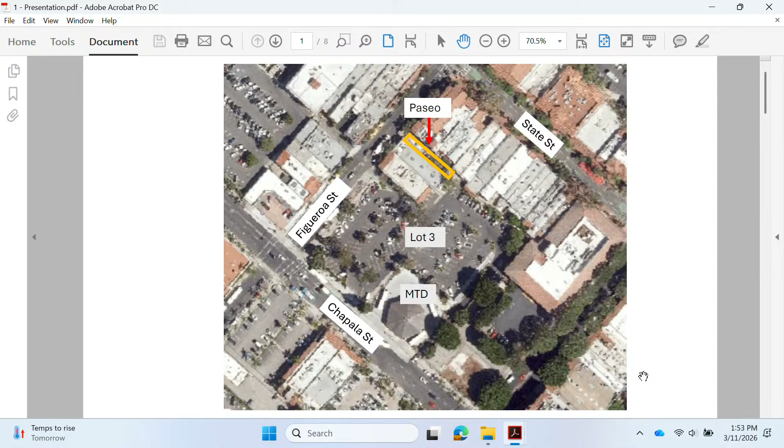Thank you, Sarah. Just wanted to orient everyone. First, I'm Chelsea Swanson, project planner. So we're looking at the area outlined in yellow, which I think most of you are familiar with. This is at Lot 3. It's a paseo between the lot and Figueroa Street.

As Sarah mentioned, one of the goals is to remove approximately 6 columns that formerly had a wood trellis over them many years ago. It was removed, it was rotting, so we want to open up the paseo and get the columns removed.

Also, as mentioned, there are many different materials in the paseo due to utility work over time and not replacing those materials. So one of the goals is to create more of a uniform look.

The way we would propose to do that is with what's called StreetBond. It's an epoxy layer that you can roll on or spray on. We got a few samples for the working group.

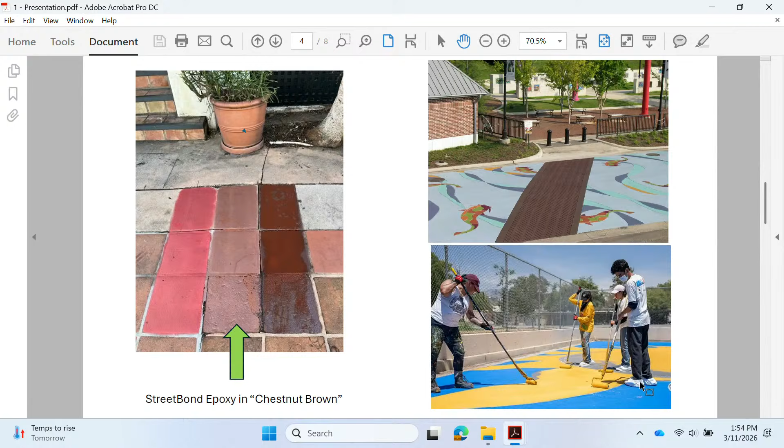We've looked at doing more of a zigzag pattern, but we're open to any pattern suggestions, and that would be throughout the entire paseo.

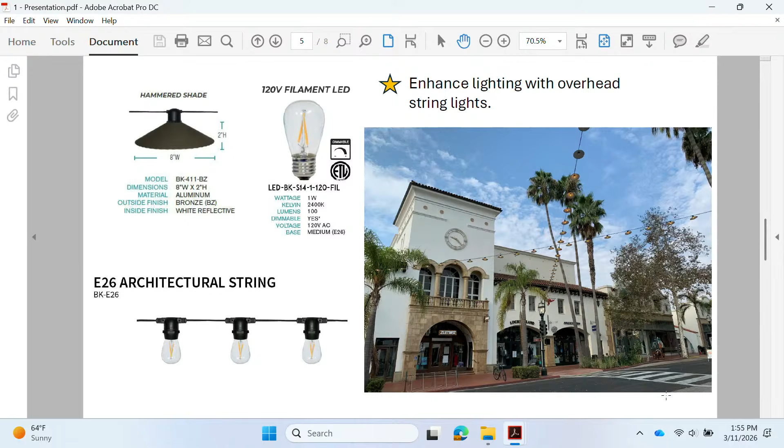I don't have an image of it, but as Sarah mentioned, we would also put twinkle lights on the center tree to add additional lighting.

As mentioned, we would like to add some screening in front of the transformer as you view it from the Figueroa Street side, which it's closest to. We would propose a large singular pot in front of it, with an olive tree planted in it.

There's an option to add some aloe at the base of the pot as well, since we do have concerns about people sitting and hanging out, which can happen if we have a large pot.

There are 3 existing in-ground planters where we would refresh the landscaping with jade, right here, which would match what's in the existing planter that you can see from Figueroa Street.

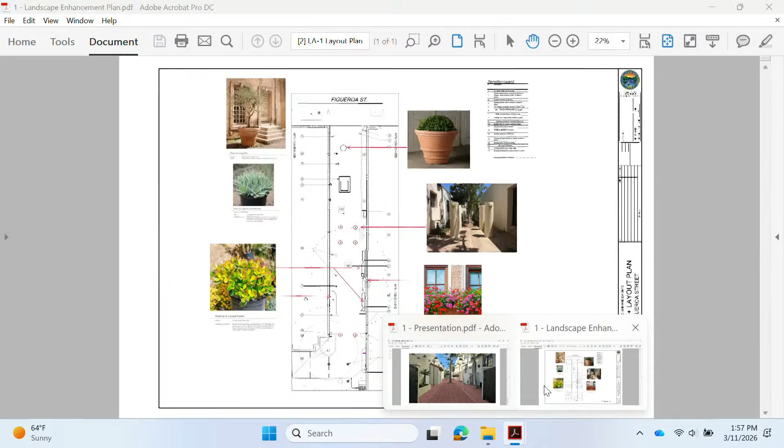I'm just going to quickly go to a plan view to give you another perspective. So Figueroa Street here at the top of the plan, and lot 3 at the bottom. The transformer is approximately here, and the idea would be to screen it with a pot here with the olive tree in it.

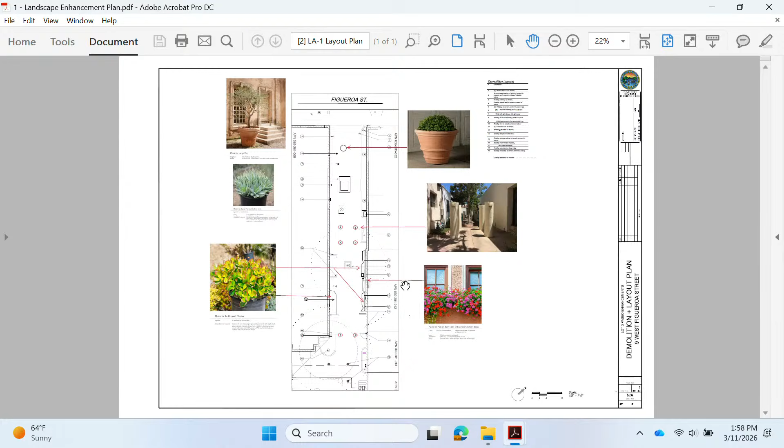These circles are just the column locations that would be removed, and the jade plant would be added in the existing planters. It's not in this image, but there would be overhead string lighting throughout. So that pretty much covers what we're proposing. Welcome your questions. Thank you.

And just as another note for commissioners, while this is the midway plan, the early plan, they also tied to the longer range plan for additional garbage enclosures and things like that. But then picking out the areas that can be done now with a smaller budget, which don't have to reverse things later. The idea was that Arcadia had worked it out a little more with everyone's working group, even the mayor, and the village and the city. The nice thing is they're not going to have to go backwards from this plan to the next, finally finished plan. So I just wanted to add that as an additional piece.

Okay, so if that completes your presentation, we can go to public comment on this item. At this time, I do have one speaker slip for public comment. Rick Clausen, if you want to come speak.

Thank you, Commissioners. You turn it off. Thank you, Commissioners, I'll say it again. I'm quite happy to see this item on the agenda today, and I'll just give you the executive summary. I think it looks terrific.

From the public standpoint, and I may be the only person here as a member of the public, but I do remember this project when it started several years ago, and I was frankly a little suspicious. It came, I think, from the transportation or traffic department, and it seemed to me like it was promising to pay you Tuesday for a hamburger today - that if you let us close this Paseo because it's a harbor for trash and unsheltered people live there, all those reasons the businesses wanted it closed, we will figure out a way to create a Paseo continuation from across the other side of Figueroa. I thought, okay, I don't buy it.

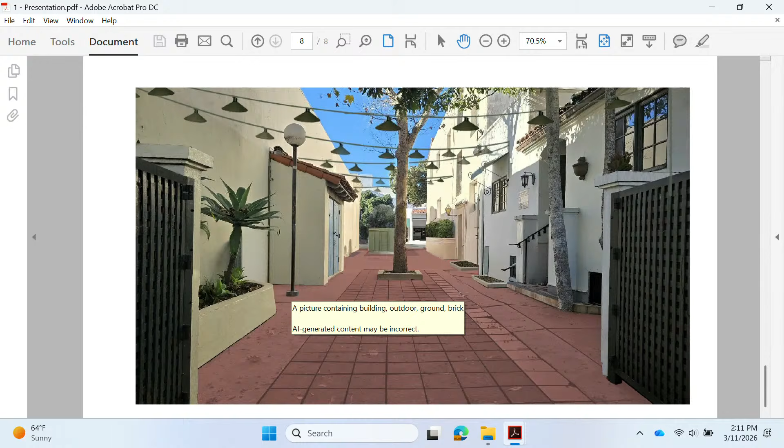Also on the right-hand side, there are some, I don't think, are those curbs there? There's no, also there aren't curbs. We apologize, this was an AI-generated simulation, so it's just not quite accurate. It's just flush, and there's just dirt there, and right now they have a bunch of pots piled up on there, which we were going to remove.

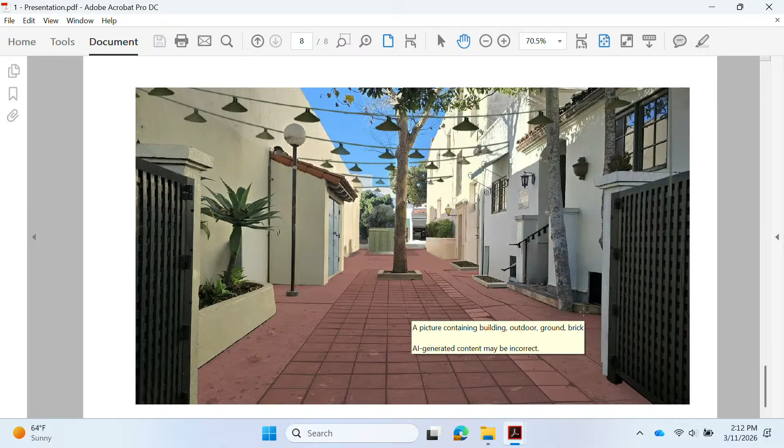The other issue is that big pot in the front. If you could go to that, yes. And we talked about this after we were there, and we really want that to be a statement. We want it to be the largest pot possible. Commissioner McClure looked, and I think we have it at 54 inches. So we want it big, as big as possible, so it's really a statement piece.

And then it's got this olive, very similar to the picture there, and then these kind of pokey aloes at the bottom, so that kind of deters people from sitting there. But maybe going back to that illustration, the one with the pot, it'll be bigger than that.

And also on the right-hand side, the utilities will have a cage on them. You're going to add a cage so people don't tamper with it. And again, to Commissioner Butler, it's all about the budget right now.

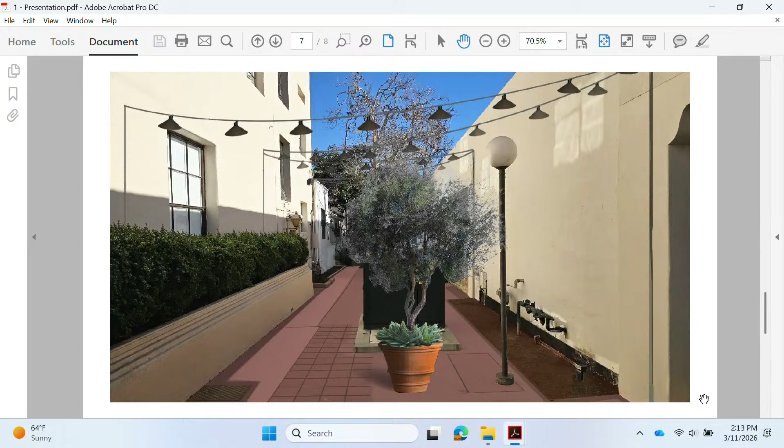It's like, what can we do right now to just clean it up and not spend money? So that was why we didn't want to take that column out, that post, the light post, because it's more money to then tie the electrical back. So we thought the simplest thing to do would just be put a nice little lantern fixture up there, get rid of the 1970s globe, and it'll add a little bit of poetry, a little aesthetic to it.

We think it's going to be much, much improved. Both property owners are very excited about it, and I think it's possible they will also come back and do some upgrades. No guarantees, but the awnings in the back could use a little refreshing, and they may come in and do a more colorful awning. And certainly there's discussion by the DSBIA about possible murals being done. But this is sort of the basic background.

So we'd love, of course, to rip all this out and put something nice, but it needs to just be a good flat surface and tie it together with this paint. The main thing is it's a huge improvement from what's there right now. And we can afford it, and we want to get it done. We were trying for Q1, but spring's already here. We've still got a couple of weeks, but we don't want to get delayed. The goal is to really clean it up, but still make it visible and see through to the other side.

I'll just say that I remember when Commissioner McClure was traveling in Europe, and he sent this picture of a paseo that literally was just this very simple paseo with no plants. And it was beautiful because it was just the walls on either side of the buildings, and it was just this clean, straight paseo with a nice surface, which is much less than what this is. So I think there's lots of ways of looking at it, and I feel like we picked the right things to focus on - the lighting, keeping that central tree, and the twinkle lights wrapped around the base gives it a nice focus at night.

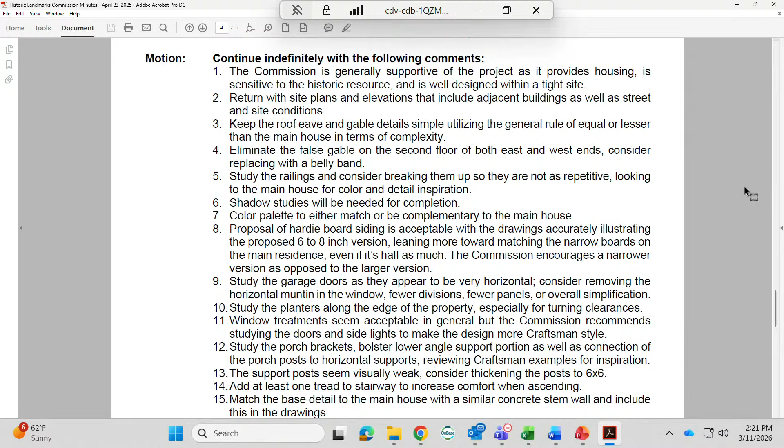Sixteen, study the stair encroachment in the rear yard setback as potential for lengthening the whole building. Seventeen, consider giving more width to the corners and the center of the building at garage level, potentially dividing the garage doors. Eighteen, study the third floor bathroom window on the east and west elevations. Nineteen, the commission agrees that the project is ready for a Phase 2 historic structure site report.

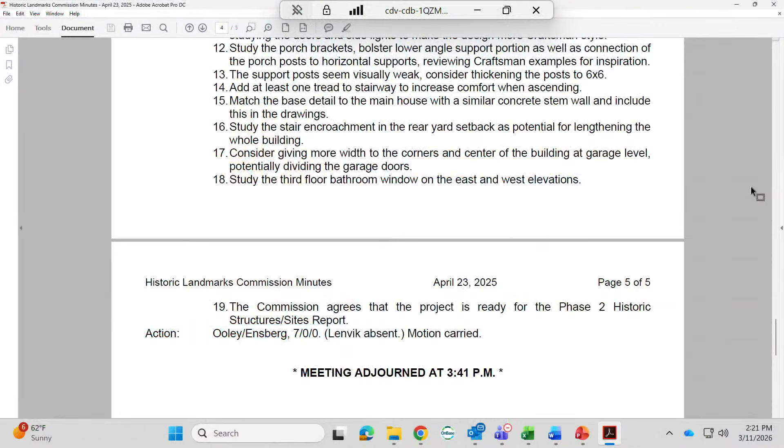Action was by Ooley, which is now stricken. Action by Ooley, second by Ensberg, 7 to 0. Lenvik was absent. The motion carries.

All right, so with that, Commissioner Lenvik, did you review the materials? I did not review this. Okay, so questions for you, but not comments. Pardon the interruption—through the chair, to Commissioner Lodge, you were not on the board during this time. Did you have a chance to review?

I just realized I spent a lot of time reviewing the historic resource report, which didn't need my attention—I didn't look at the previous meeting. That's all right, you can ask questions, just no comments. Questions for you as well. I think we'll still have a quorum because they don't have to vote necessarily to be part of the quorum. Yes, we still have 5 remaining members who can vote.

Okay, all right. So with that, to the applicant, go through how you addressed those meeting minutes as well as any other changes since last time we saw it.

All right, thank you. So I'm just going to start with the exterior elevations. One thing was keeping the roof eave and gable details simple, and we are showing that the gable detail on the new duplex is going to match the existing primary residence with a lattice detail at the vents.

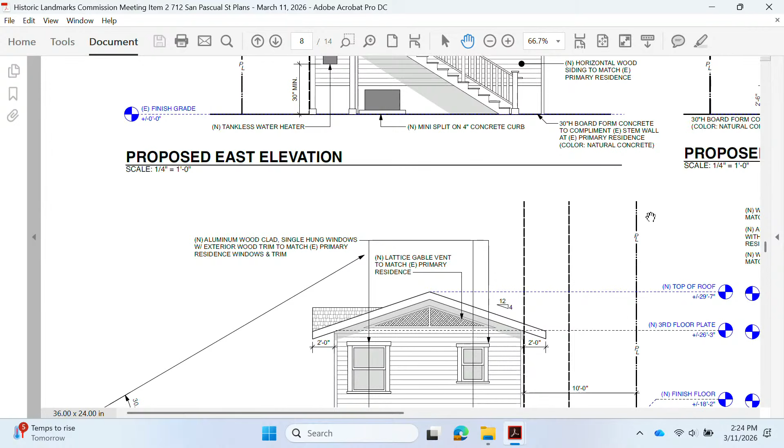I want to show you the front elevation so that you can see also along the front, the balcony, where the members have been beefed up and doesn't look quite as spindly as what it did before. Now the support beams supporting the balcony, those are the 6 by 6s.

And we have removed the false roof that once came all the way out. That's just been taken back. So now it's just a shed roof over the front balcony.

Another item while we're looking at the elevation was the siding for the existing residence versus the hardie board that we are proposing. The siding for the existing residence is only 3 inches. The smallest size hardie board that they make is 5 1/4 inches. So we're just going to go with the smallest size of hardie board that they offer, which is the 5 1/4. We have also addressed the commissioner's concerns about the garage.

We have simplified it greatly from our last version. We removed the muntins that were once there. We made it a little bit more vertical than horizontal. We simplified the windows and just overall simplified the design of those garage doors.

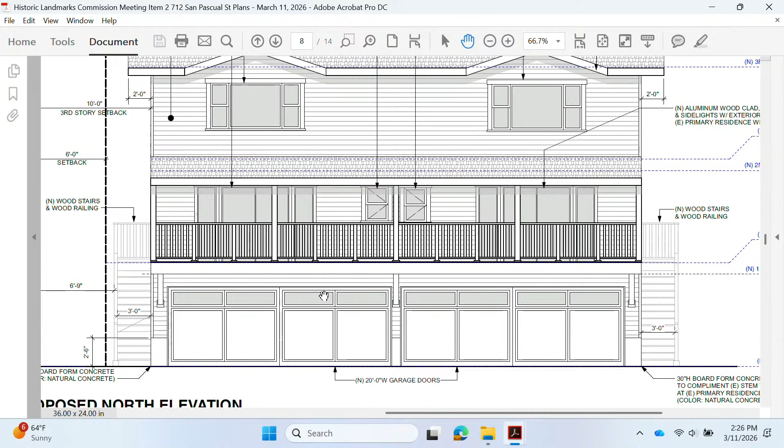We were also asked to study the window trim for the exterior windows, and based off of what is on the existing house, we have designed our exterior window trim to match for this one. When I get to the material sheet, I'll show you those dimensions a little bit more.

Again, while we're on this, we were asked to address the bathroom window on the 3rd floor. We've reduced the size of that window and we've centered it over the 2nd floor window. It was a little tricky just because of the location of the bathtub and where we could put that so that it was still on center, being on the inside of the room and still working with the bathroom fixtures.

Now I'm going to take you to the material sheet so you can see the colors that we have selected. So the primary residence will be painted to match the new duplex, and we're going to be doing the Sherwin-Williams Colonial Revival Gray and Sherwin-Williams Alabaster for the trim.

One item that we were asked to address in the previous hearing was for the stem wall cast. I believe that was one of your comments, that you wanted to see a stem wall on the new duplex to match. We are going to provide a board form concrete stem wall at the new duplex to complement but not match the main residence. The stem wall on the existing residence will be painted the alabaster so that they're complementary to one another.

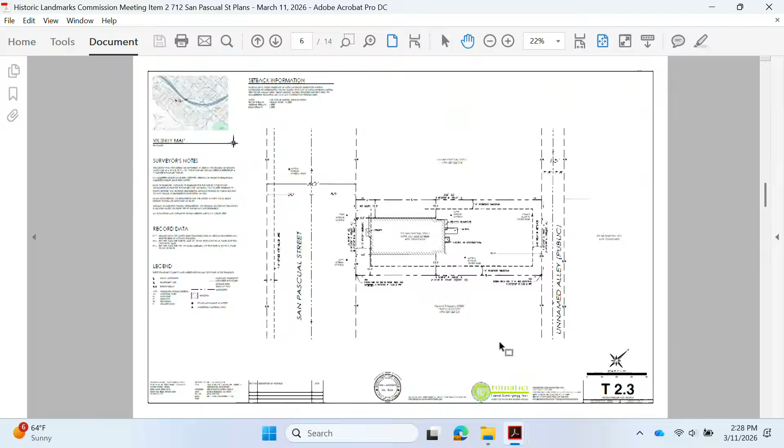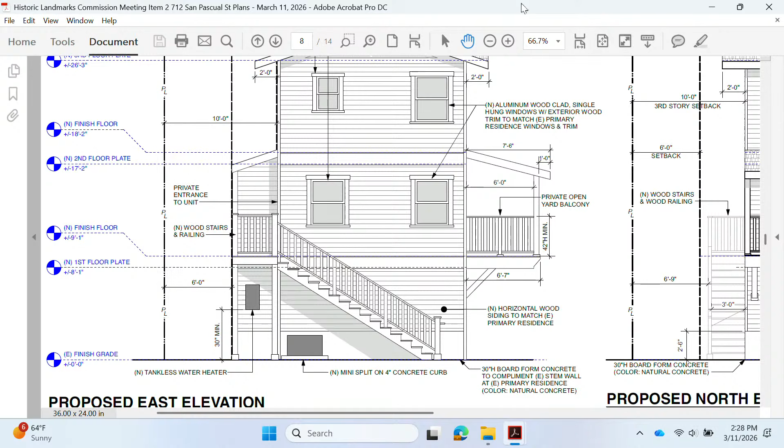And then I'll zoom in. On the stairs, we took your advice and we removed one of the treads to make it a little bit longer and shallower.

We're calling out the sizes now with 6x6 posts, a combination of 2x4 and 4x4 rail post and top rail.

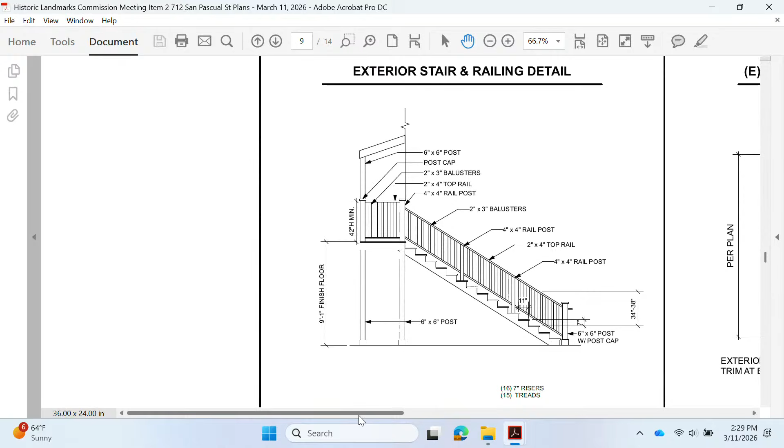And the balcony railings are similar, with the 6x6 supports under the balcony, 2x4 top rail, 2x3 balusters, and this matches what is on the existing railing at the front of the existing primary residence, with a 4x4 rail post in between.

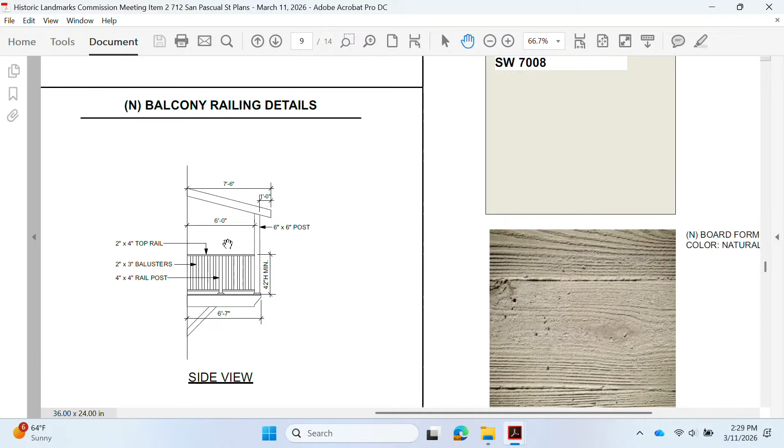And the light fixtures that we're proposing are Craftsman style, but also very Santa Barbara.

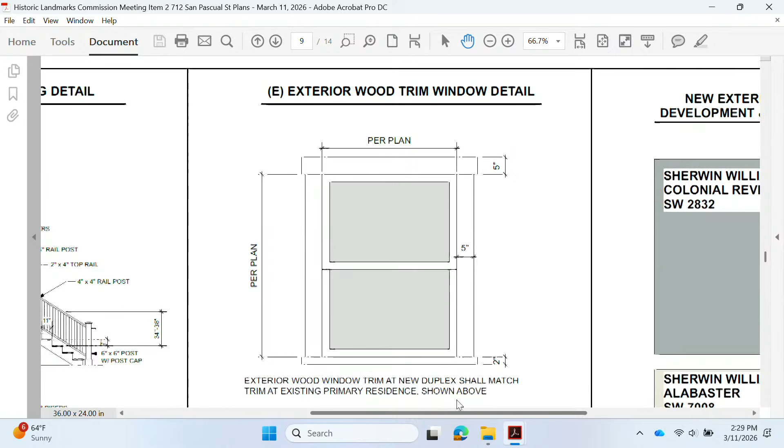And for the exterior window trim, like I said, this is based off the existing primary residence. There is one large window on the front with very large exterior framing - the trim was 8 to 9 inches on either side - and we figured that would be too large for the smaller windows on the duplex.

So we took the window trim from the side and rear portions of the primary residence to use. It's a 5-inch trim on the sides and top, and 2 inches on the bottom.

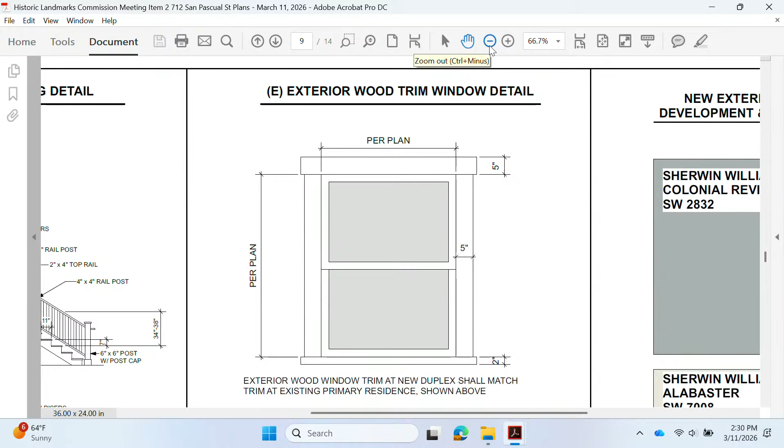And with that said, I think that addresses all of the comments from the minutes before. So now I'm going to pass it on to Charles McCune to go over the proposed landscaping.

Can you just scroll through? Yes, it won't take long.

So we have a planting plan, and there's some existing trees we're keeping that the owner would like to keep. There's some new planting in the parkway, a replaced hedge that's 42 inches out front, and a new gate at the front sidewalk.

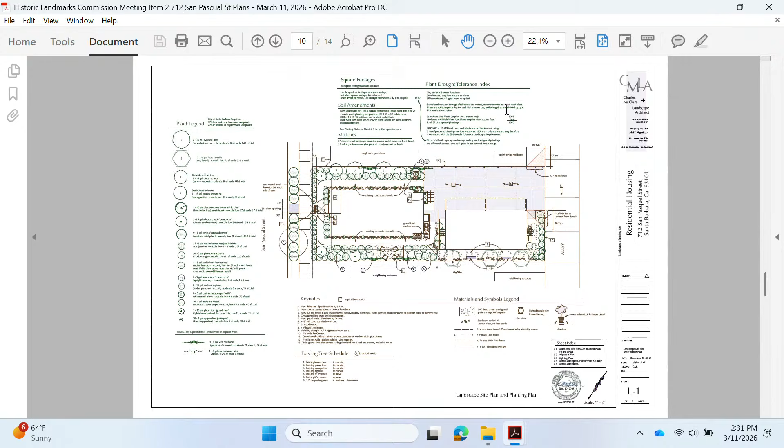And we can go on to the next one. It's irrigated. There's lighting - real simple, just walkway and a couple of uplights and a couple of just highlighted trees.

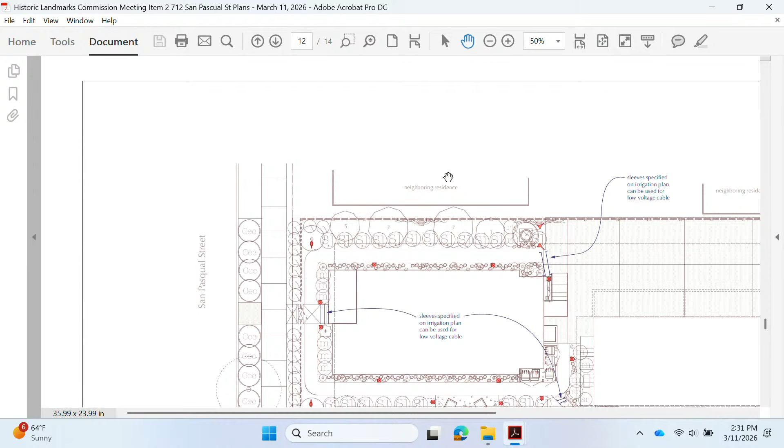And then notice at the top would be - I guess that would be west - the corner where we have our special element. Hold that thought on what that little thing is with the 2 uplights, and if we go to the detail sheet...

We just get a little feature when we come in off the alley - it's like a stone plinth with a pot. And that just gives the residents a little something as a focal point when they come in late at night.

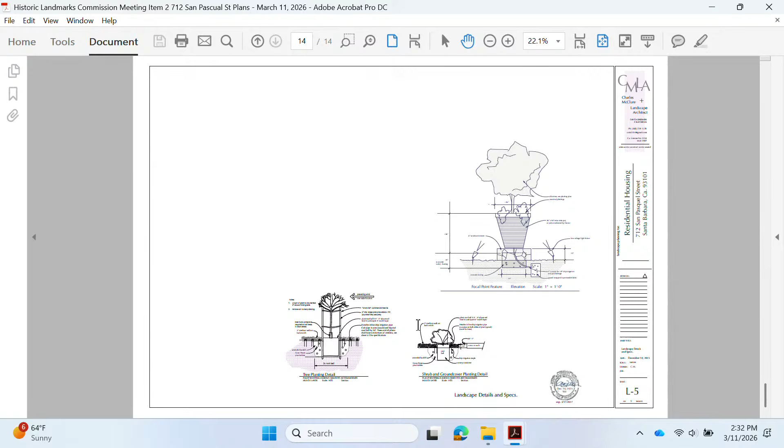And to add to his landscaping, one of the notes we had when considering landscaping was to evaluate the planter along this edge of the driveway. Because of the backup maneuverability dimensions we need, we are not proposing a planter on that side of the driveway.

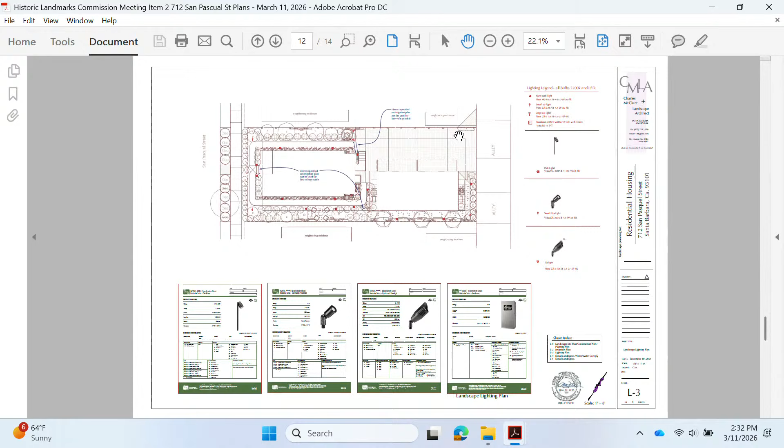Does that finish your presentation? Yes. All right, in that case, let's go to public comment.

Could you zoom in on that balcony detail that shows side and front? A tad more, I want to be able to see both. Oh, there we go. This might be a drafting thing.

The side view gives me the impression that each of those cantilevered supports have a detail on the end of them, which would suggest, when you look at the front, there are a series of them marching along, but it looks like you have some kind of ridge board. Could you explain why those two are different?

You're correct, I did make a mistake in drafting, and there is a ridge board supposed to be on those, and I will correct that and provide a detail.

I guess I'll add another question - does it have to be a ridge board? I'd rather not have the ridge board. Can you have it be the open rafter? If you would prefer it without it, I can remove that. Okay, saved you some money.

And then the knee brace, which you've labeled as a corbel, but it's really a knee brace, isn't it? It strikes just one of those cantilevered beams.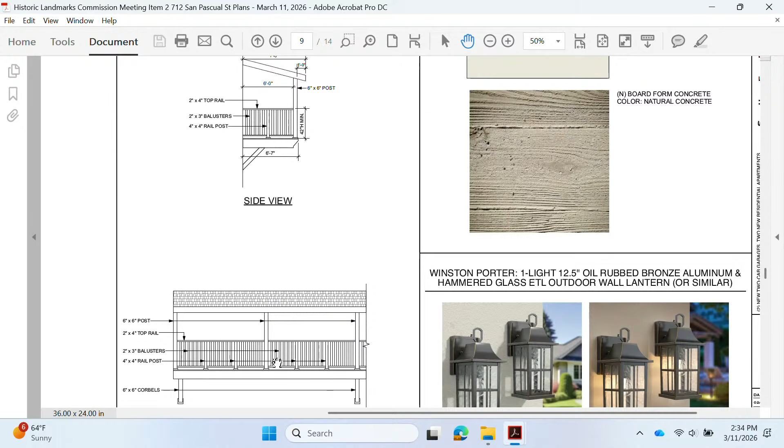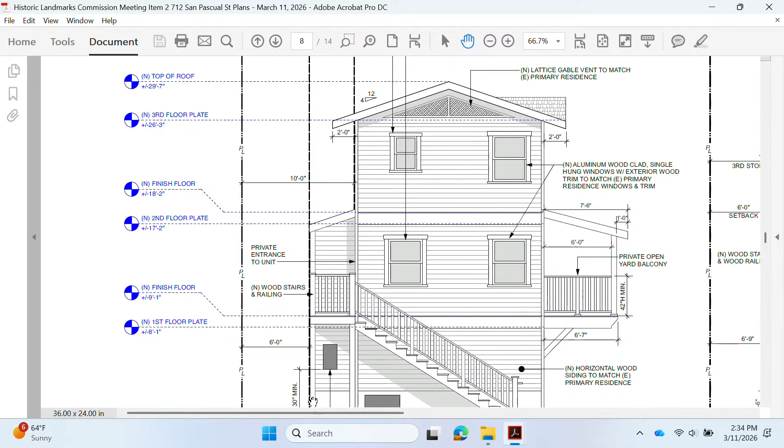Can you go to the elevation too, as a detail? Because there doesn't appear to be a beam going across to support them. It looks like it strikes one of those exposed cantilevered beams. The front... oh, it's shown as a ridge board.

So basically, without a ridge board, you're going to see these cantilevered beams sticking out. And won't they want to line up with the beams? Yes, they will want to line up with the beams. There's only 3 of them, so it's going to be interesting.

The 2 knee braces on the ends won't line up with one unless they're right at the corner. Yeah, or they scoot the post in to line up. And reposition, because then the center will hit and the sides will hit. But the cantilevered beam will not hit because it's at the edge of the framing. They're going to put 2 side by side, one with a knee brace, and one... you see what I'm saying?

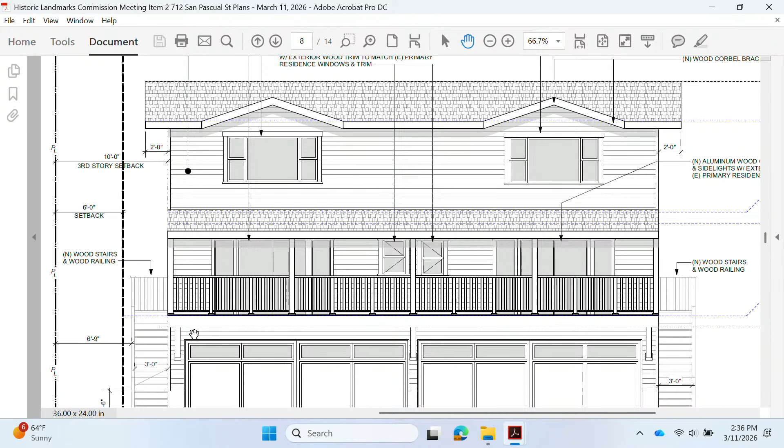Right here. What I'm saying is, couldn't you scoot the post in to line up with the framing? Yes, you're clever, but we can get into that in comments. There's some resolution that needs to occur. I think we can move the knee braces down to line up with the edge. They're typically at the corner of the beams. Exactly, yeah. All right.

Other questions? Commissioner Ensberg. Yeah.

Well, on to that, what they were just talking about. So there are 3 - one in the center, and then 2 on either ends, right? Yeah, for the knee braces.

Okay, then tell me about the garage doors. What is the material in the bottom, the big square? A specific door hasn't been selected at this point, since we haven't gotten to the construction documents phase. But we wanted to keep as much with the craftsman style as we can, so something that is maybe more of a wood type material. We also wanted to match the new board form concrete stem wall, and give it a bit of warmth and texture. But we have not selected a final version.

When we come back for final project design approval, we should have a spec sheet for those garage doors. We had suggested you simplify them, and you have done exactly what we asked for. Of course, the issue is that there's so many of them - there's 4 - and so that becomes a challenge of how do you make them work.

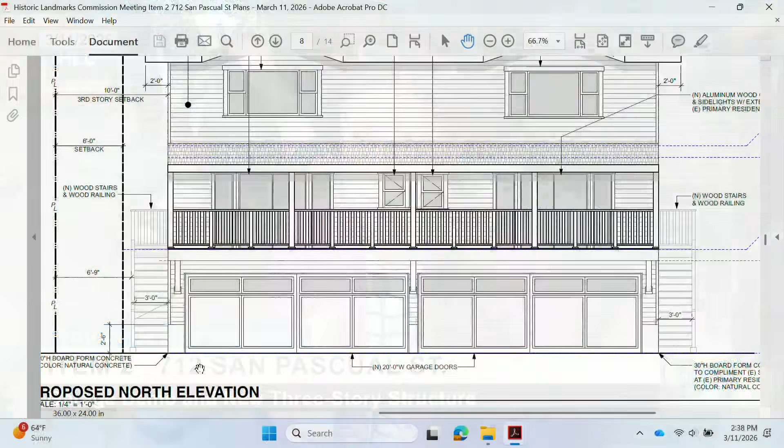One question I'd have is, are these roll-up doors? Yes, correct, they are roll-up. So they have divisions? Yeah. Okay, they're not a flat panel. Correct, and I think we were showing those lines the first time, but those lines were misinterpreted as being part of the garage door. So it is going to be a roll-up door, and just for clarification, it is 2 20-foot garage doors, not 4 separate doors, but just to break it up so it's not one big, massive, solid sheet. We're showing it to look like 4 doors.

Otherwise it would be an eyesore. Yes, I understand the problem, but I'm not sure we've gotten there yet. But how do you feel about it? We asked you to do this, and now here it is. So how do you feel about it? Are you satisfied? Do you think it's getting there, or do you feel like you'll get there once you start actually picking out the door?

I think once we are able to select the door, it will look a lot better. I feel like this is a drastic improvement over what we presented the first time in terms of simplification, because the commissioners were correct - it was too busy and too much. This is more in line with the style of the craftsman home that is already there and what we are trying to incorporate into the design to be complementary.

Okay, well, if there were 3 lines drafted in on each of the square panels, that would help a lot. It would help a little. Well, we'll have our comments, but I wanted to see what you thought about that. And then can we just go to the colors for a moment? Sure.

Just to confirm, you want the house, the new and the old, to match? Mm-hmm, that's what you're saying. And the gray is the body color, and the alabaster is all the wood - the railings and all the woodwork, the trim, et cetera - is all the alabaster. That's correct. And then the form board is what we see there, the gray.

Okay, so I wanted to confirm that. That's my question. Okay, thank you. Any other questions? Yeah, Commissioner Butler.

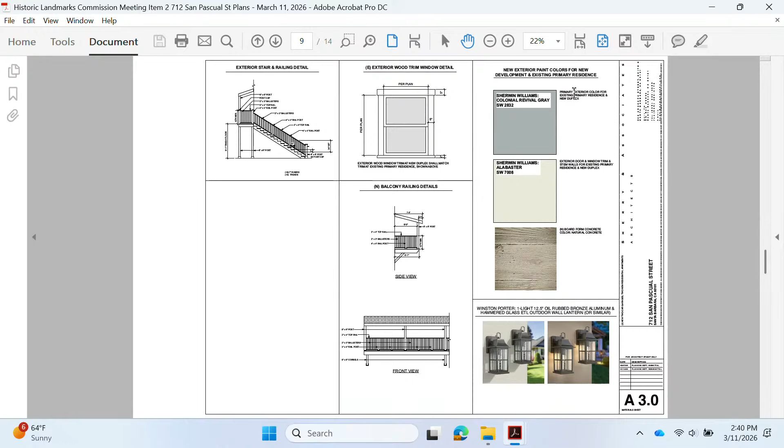Back to the garage door. Just for a point of clarity, the top pane on the garage doors, that's not glass, is it? Yes, those are glass. So the top panes are glass, so you can see into the garage, the top portion. Correct. Okay, thank you.

All right, any other questions? All right, let's roll into comments. This is for project design approval, and project compatibility findings are required. So with that in mind, as well as a list of things that we want them to come back with, maybe we'll just start off with a discussion to keep things moving along. Is everyone feeling that this is, in general, okay for project design approval, or is there some fatal flaw?

Right there on the front elevation, the two look like bathroom windows in the middle of the building. Yes. Do they really swing? Yeah, they have a drafting error, and I've already caught that, and I've already updated it on the plans. I hate that it was on the plans that got submitted. No, you absolutely got me.

All right, so let's go with, who wants to start with other additional comments to refine as they come back for final approval? I think one of the comments should be about the ridge board or edge board on the balcony, should be eliminated. So edgeboard and balcony to be eliminated, and for the knee braces to align with the posts and associated beam that it's setting underneath.

Okay, great. All right, for the windows, the bathroom windows to have the casement and follow their swing, which is already done, but at least it's noted. What about the garage doors? Any thoughts on the garage doors? They look fine to me as long as it's not T111 siding.

Okay, I just question the glass on the top panel. That gives me a little thought about security and what you can see. I know it's at the top, but I wonder if that may not be necessary. Well, one thought I had on it was actually the look of it.

You see this sometimes with Craftsman garage doors, having a vertical light, just simple, a couple of muntins that divide it into smaller vertical lights, like carriage looking things. It might give a little bit of effect of more screening, even though it wouldn't really, because you'll still see up. But I think in general, wherever people are standing, they'll be standing and looking up more, so it'll be sort of the top of the garage.

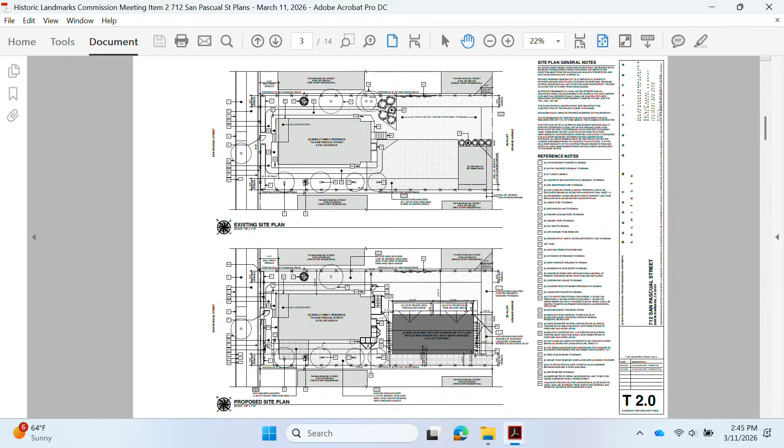There's also going to be hedge screening on this side. Really, the only portions where, and this is a very narrow alley on Orange Avenue on the back, there's not a lot of visible residences facing this. It's the backs of everyone's houses on this side. So I don't think there is going to be a lot of traffic to where somebody would be able to see in those garage windows, if that helps at all.

Yes. All right, Chair? Yes, Commissioner Ensberg, and then, oh yeah, then Vice Chair. Go ahead. Can we go back to those garage?

Yeah, no, I don't have a concern about it. It's a very common thing, not unusual at all. I'm just trying to figure out how to make this, so you're saying there's two doors, the one on the left and the one on the right, and it's broken up like we see.

Let me just ask this. Is it possible, since they're fake, that you could make the space between them larger? For example, between each of the pairs, you had a wider space, like a false column.

And I think that could really help. Right now it just feels like this, if it could be, and maybe that's custom, I don't know, but I'm just going to ask that question. Can you zoom in actually on them so we can make sure we're talking about the same thing?

So you're saying between the two, the seam? Right there, right there, okay. If you made that fake column wider, that might even be similar to what we're seeing over here in the middle, then it would actually look like they were two doors. And I think that would really go a long way to helping not have this repetitive thing going on.

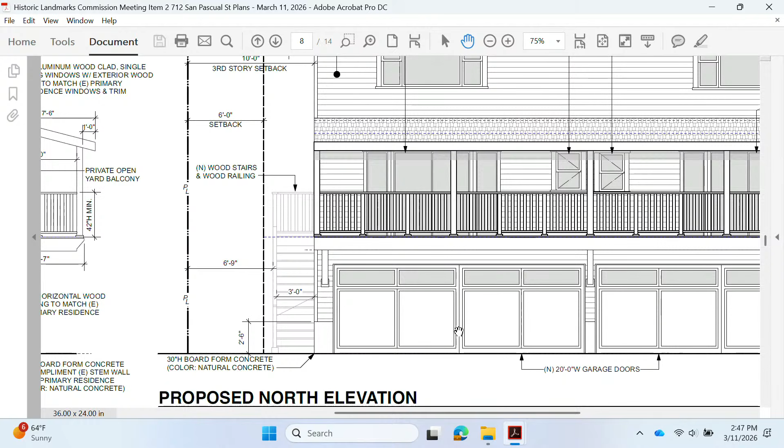And then I think, as Mr. McClure said, because he's on the other side, you've got your divisions, I think you have three that will go across there, and you will see them. I think that will help break it up. But that's just my one thought of how to do this, and maybe that would be a way to do it. We can study that as well.

That's all one single door. You can't put a post in the middle of a single door. No, it's not - it's a fake panel that looks like it, it'll have chops on it, it goes up, and it'll have a seam line, so if you're looking carefully you would notice like, oh, that really isn't a column, but it would look like it was.

So I think that could be good. And then the other thing I was thinking about, you can reject it, is whether, a lot of times on these, this era, you will see - and I know we've got horizontal, but if you had vertical on just the doors, I wonder if that might be something worth studying. And to the window thing, maybe you eliminate the windows and just have vertical and keep it really simple, as another thing you could take a look at.

But I'm just trying to help with this little sticky wicket. But I think you've done a really good job. Okay, and that's all I had on that.

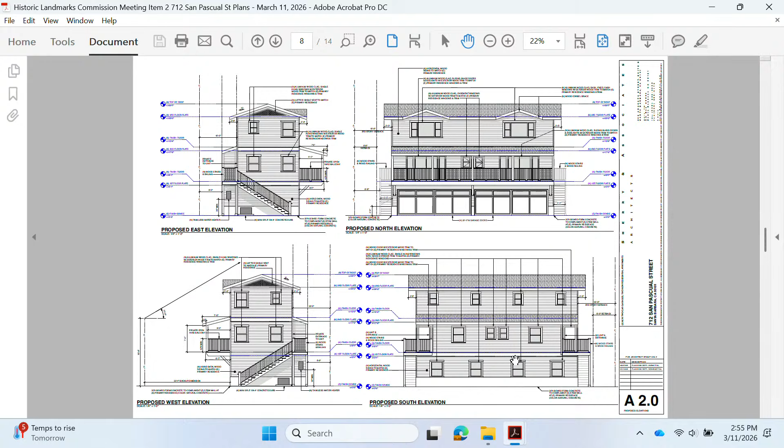Okay, so we'll keep the comment as changing, if that still works for your design? Let's keep that comment as changing the double hung ones to look like casements, similar to the small casements on either side of the picture windows on the third floor.

Any other comments? Colors - yes, bring back samples of the colors, including a sample of the existing, and they are to be either matching or complementary. We'll look forward to seeing that. You could bring multiple options if you want.

I guess the garage doors, were they going to be all alabaster too? No, when we come back with a spec sheet for final, we'll have the color selections on those, and then for the garage doors, final. Okay, PDA, great, that'll add a nice touch.

Any other comments? All right, I'm looking for a motion for project design approval with those comments. I'll move project design approval with those comments and the following compatibility findings.

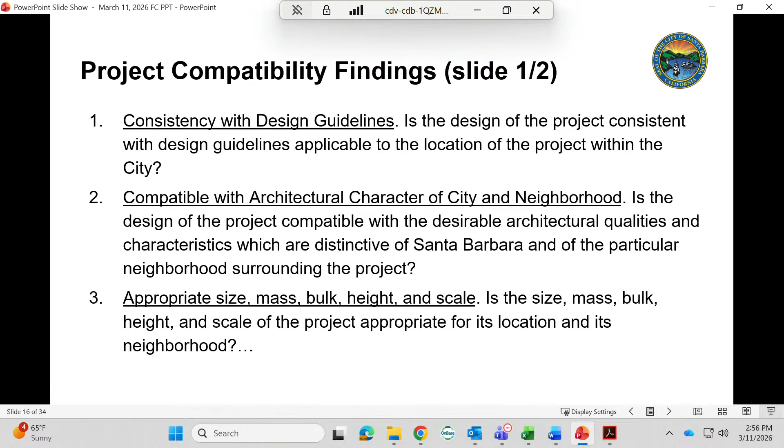The commission finds the project is consistent with its design guidelines, that it is compatible with the architectural character of the city and neighborhood, that its size, mass, bulk, height, and scale is appropriate, it is sensitive to landmarks and resources around it, that public views of the ocean and mountains are not impacted, and appropriate use of landscaping and open space has been designed.

Do I have a second? Second. All right, Commissioner Ensberg, thank you for seconding. Under discussion, any further discussion? All right, roll call vote please.

Thank you, Chair Grumbine. I'll begin with Commissioner Dorden, yes. Commissioner Ensberg, yes. Commissioner Lenvik, abstain. Commissioner McClure, abstain - you are abstaining, yes, that's correct. Commissioner Lodge, abstain. Commissioner Butler, yes. Vice Chair Uli, yes. And Chair Grumbine, aye. Motion passes, thank you.

I think just for the record, I don't think Commissioner McClure is in the room. Absent.

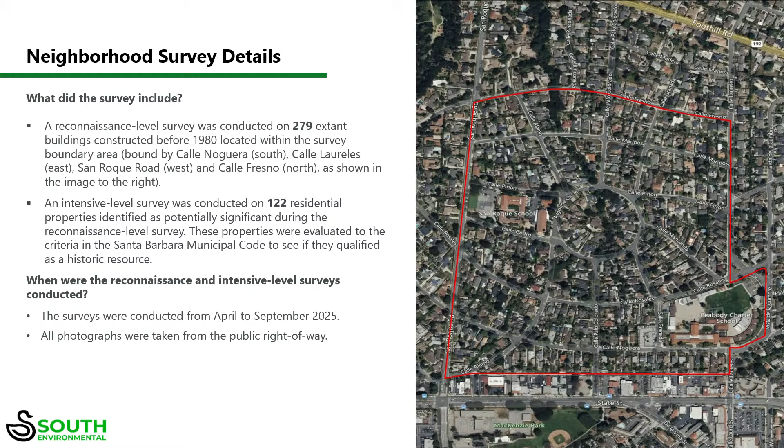Based on reconnaissance and intensive level surveys, we determined that 62 of the 122 intensively surveyed properties were historically significant and eligible for local designation.

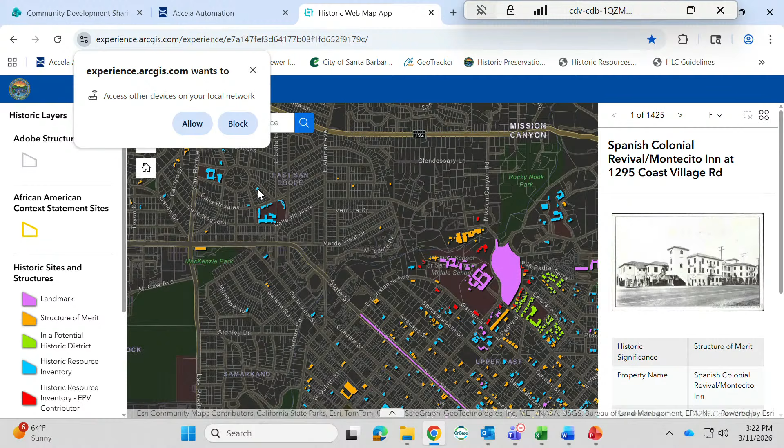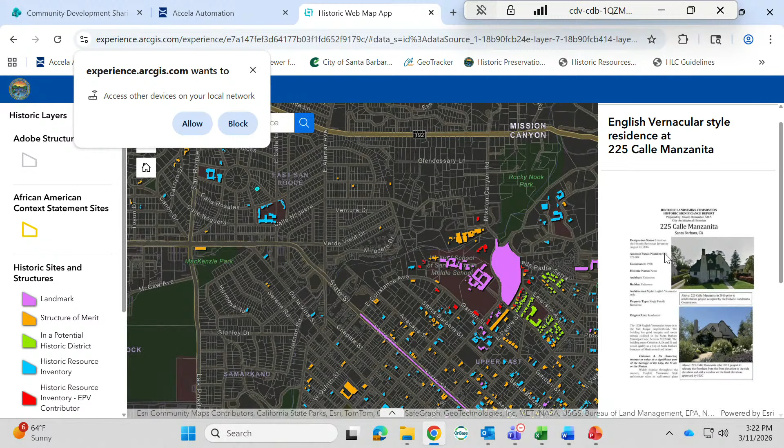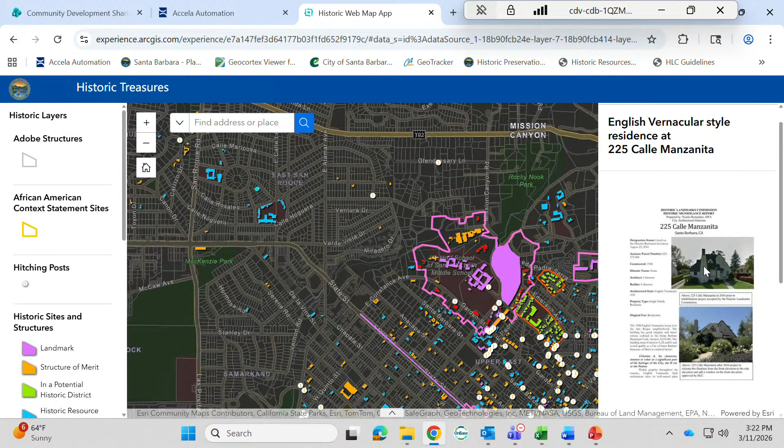Commissioner Butler, you see all these little blue dots here? This is mislabeled now because we changed the name, but it's now the Historical Register, our local Historical Register, previously known as the Historic Resource Inventory. These blue dots, once HLC approves this package, that's part of the implementation, where we get all these eligible properties added as blue dots. On the right-hand side, you can see one of the forms, the significance forms.

So we have this table, we have the significance forms, we have pictures. So any property owner or anyone in the public could look up what is special about a particular property and what its historic significance is. That would answer the question, is my house historic or not, or why it got accepted or not. And it's a great place to start.

Nice work. Right, and it's not up there now because it's not live yet. HLC is required to approve that. It'll go live when it gets our blessing.

Commissioner McClure: I understand what vernacular means, but what is English vernacular? Does that just mean the average residences of this size in England? Is that what that is? Could you describe what that really means?

This is a funny one for me. In Santa Barbara, there was a series of design guidelines and architectural styles prepared during the small homes movement. English vernacular cottages were characterized as basically a scaled-down Tudor. I had to explain to my team what that meant many times, and it was usually a Tudor without half timbering and without a lot of the high style features you'd generally see on Tudors. That's the best way I can describe it.

Shrunken and dumbed down? Yeah, and usually one story. They usually weren't more than one story, but a much more simplified, cottage-style version, sometimes with thatched roofs or a shingle roof that looks thatched. So they're super cutesy - super cutesy is the official term I was using, not shrunk and dumbed down, that has negative connotations.